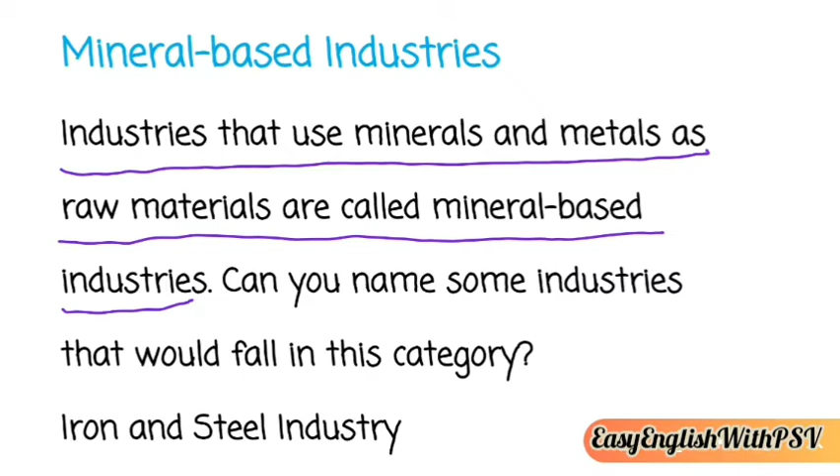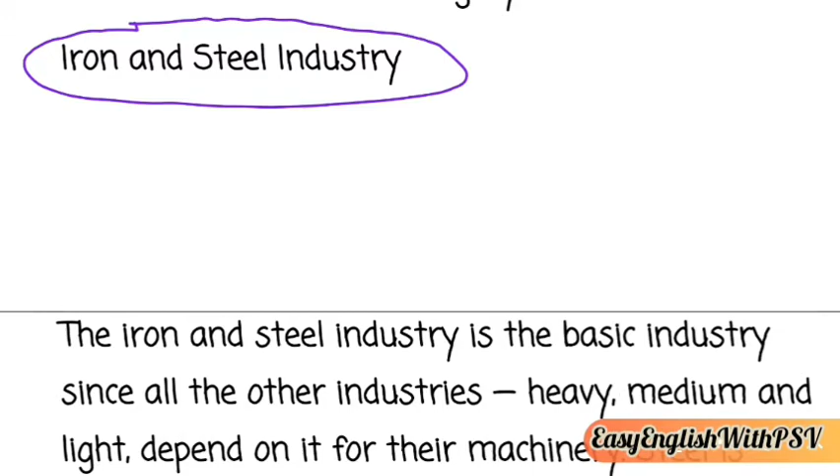So the first one is iron and steel industry. The first heading that we are going to study: iron and steel industry. The iron and steel industry is the basic industry since all the other industries, heavy, medium and light, depend on it for their machinery. Whatever machinery is made or used, that is made up of iron or steel.

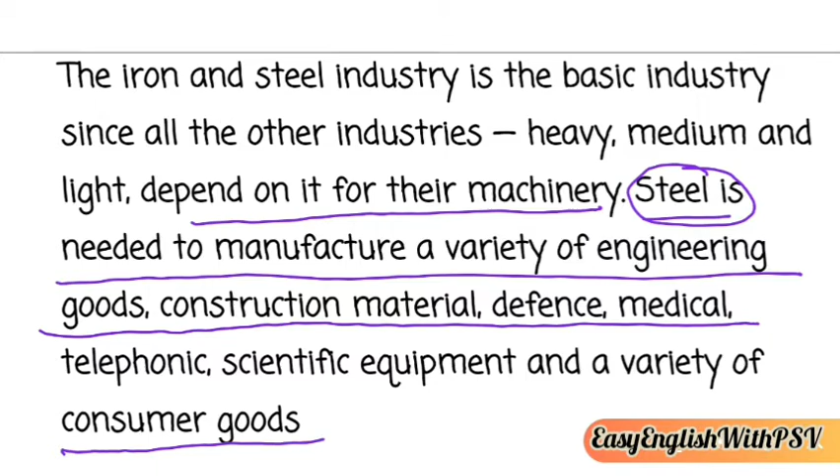Production and consumption of steel is often regarded as the index of a country's development - in what percent, in what measure there is production of steel in the country, and in what proportion there is consumption of steel in the country.

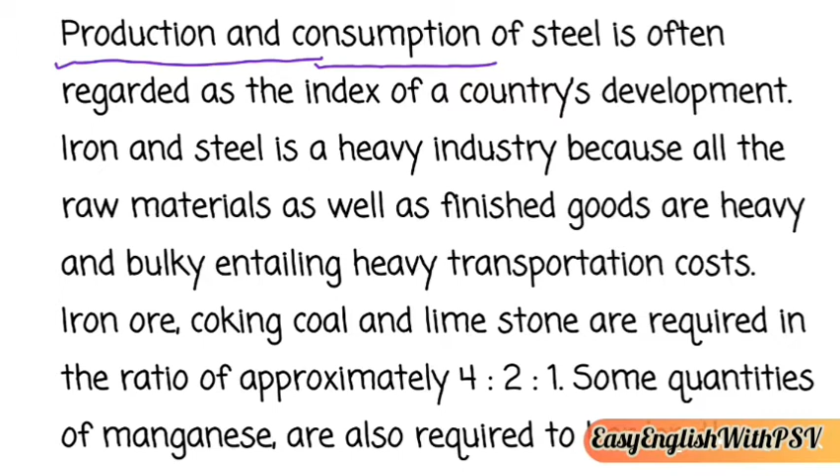Iron and steel is a heavy industry because all the raw materials as well as finished goods are heavy and bulky, entailing heavy transportation costs. Because the goods used in this industry are heavy, it costs heavy transportation charges. Iron ore, coking coal, and limestone - these three are required.

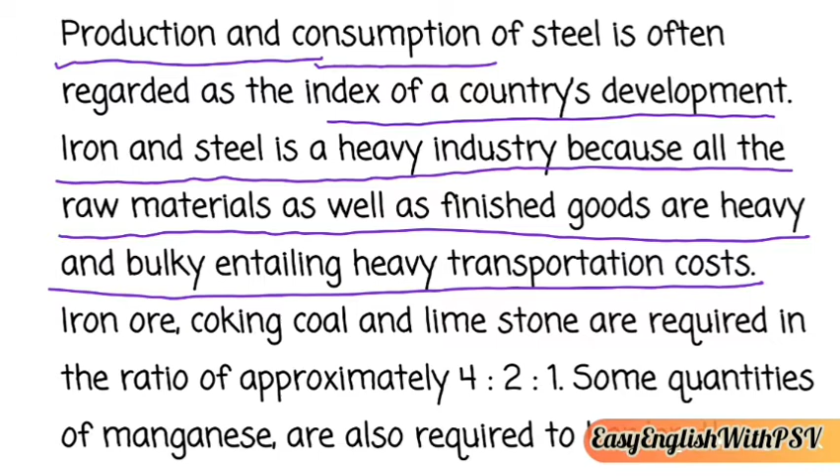Iron ore, coking coal, and limestone are required in the ratio of approximately 4:2:1 - that means iron ore 4, coking coal 2, and limestone 1. Some quantities of manganese are also required to harden the steel.

If you want to harden the steel, to make it tight, hard and stiff, then you will need some quantities of manganese as well.

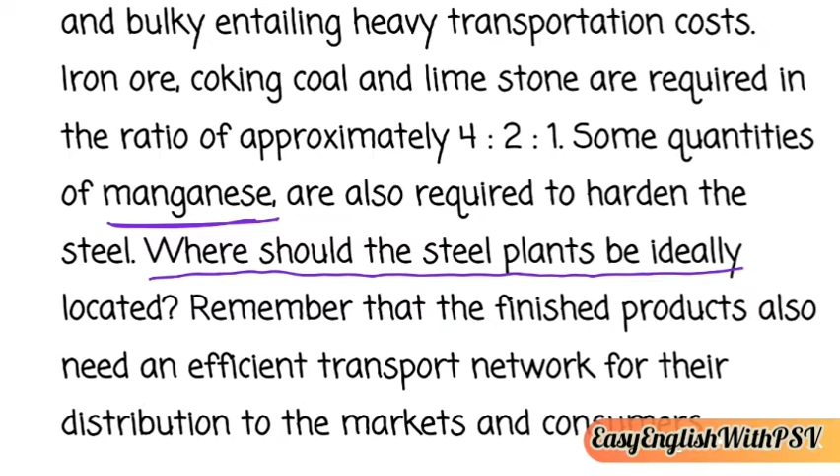Where should the steel plants be ideally located? In agro-based industries, part 1, we studied the suitable locations for any factory: where raw material is easily available, cheap labor is easily available, transportation facilities are easily available, and above all, good market is available. There are consumers, otherwise port facility is available to export goods to other countries.

Remember that the finished product also needs an efficient transport network. If you have completed the task of production, that is not sufficient. You will further need transportation of the goods to other parts of the country, to other parts of the world, and distribution to the markets as well as to the consumers.

In 2018, with 106.5 million tons of crude steel production, India ranked second among the crude steel producers. In that year we were at second place when we produced crude steel, raw steel, with 106.5 million tons. It is also the largest producer of sponge iron.

In 2018, per capita consumption of steel in the country was only around 70.9 kg per annum. We are talking about production as well as consumption of steel in India. That means one person used only about 71 kg of steel in a year.

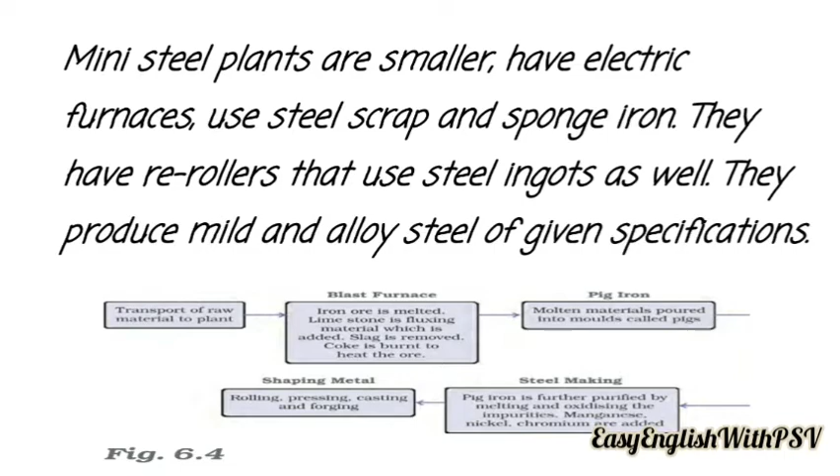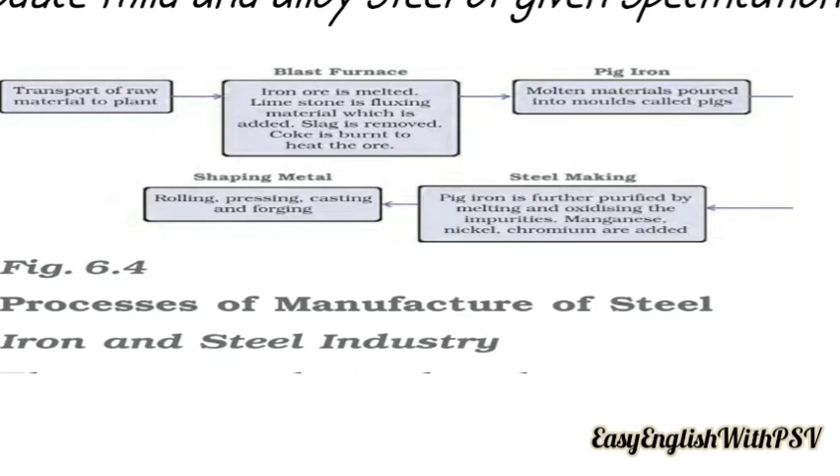Here you can see the process of manufacturing in the steel and iron industry. How is it done? First, raw material is transported to the plant. Then in the blast furnace, a large furnace, iron ore is melted. Limestone is the fluxing material which is added. Slag, the waste, is removed. Coke is burned to heat the ore.

Pig iron: the molten material is poured into molds called pigs. Steel making: pig iron is further purified by melting and oxidizing the impurities. Manganese, nickel, and chromium are added to maintain shine and prevent rusting.

Then the last process is shaping metal: rolling, pressing, casting and forging. In this way we get the steel. So this is the process of manufacturing steel.

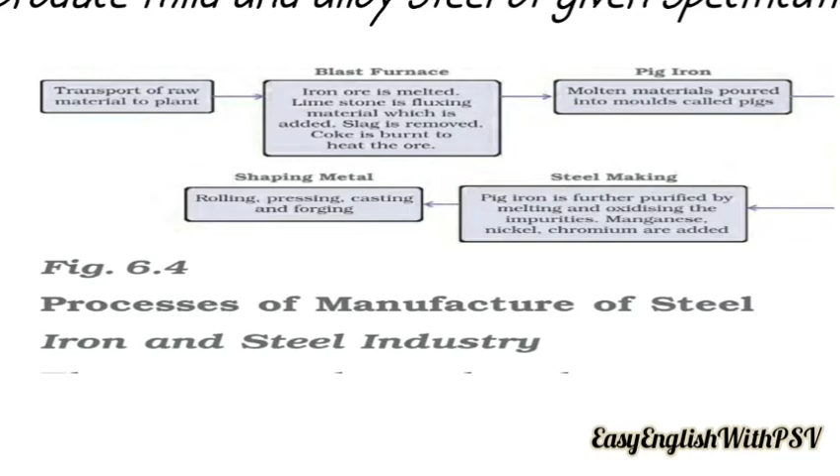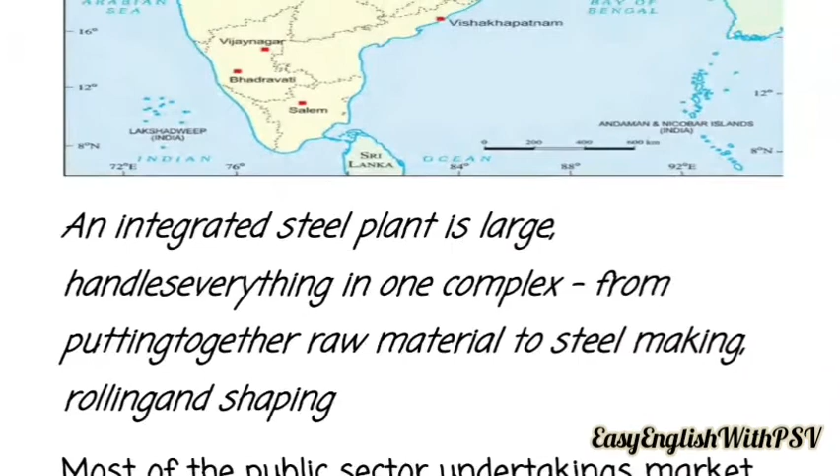We have already studied about mini steel plants. Now, what is an integrated steel plant? An integrated steel plant is large and handles everything in one complex, from putting together raw material to steel making, rolling and shaping. Everything is done at one place. We have already studied how steel is manufactured, so if making, rolling, and shaping are all done at the same place, this factory is known as an integrated steel plant.

Most of the public sector undertakings market their steel through the Steel Authority of India Limited. All the big public sector companies and undertakings in India sell their products and bring them to market through SAIL, Steel Authority of India Limited.

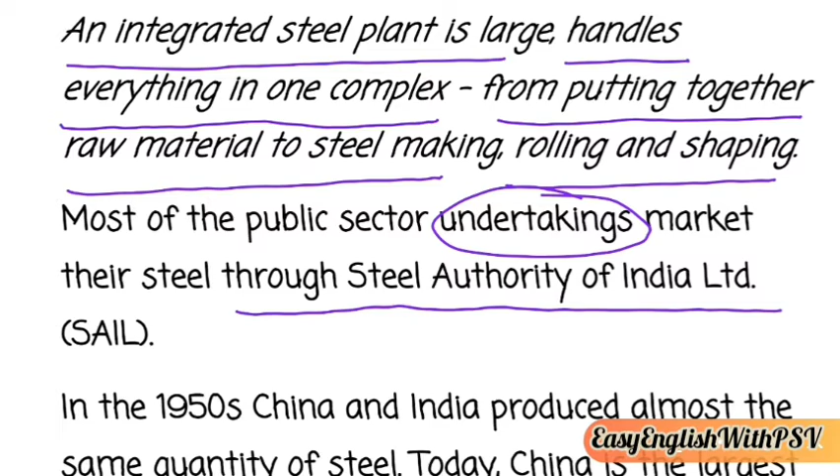In the 1950s, China and India produced almost the same quantity of steel, quite similar in production. Today, China is the largest producer of steel, and also the world's largest consumer of steel. Not only does China produce the most, it consumes the most as well.

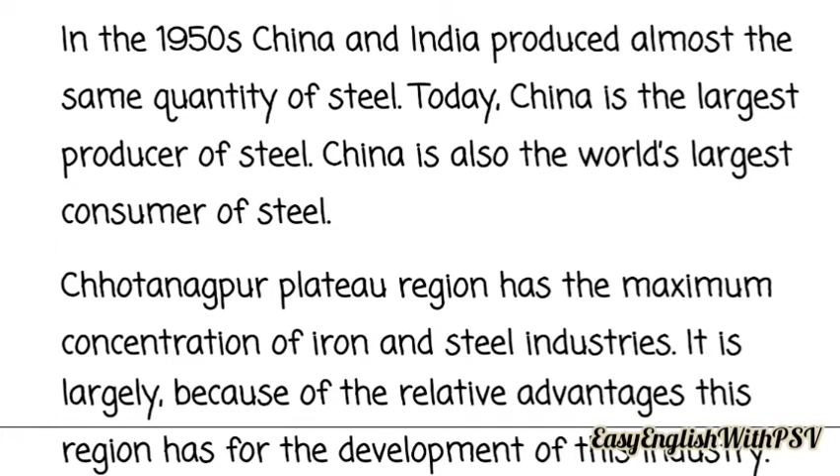The Chota Nagpur Plateau region has the maximum concentration of iron and steel industries in India. Why this region? Because conditions here are favorable.

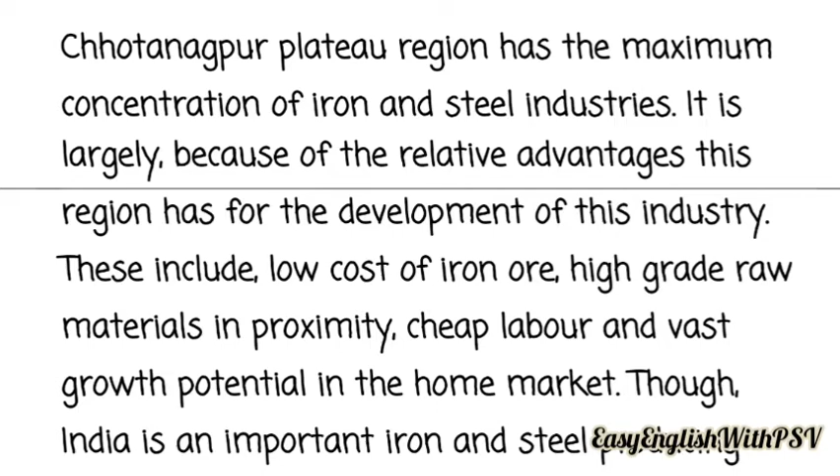It is largely because of the relative advantages this region has for the development of this industry. These include low cost of iron ore, high grade raw materials in proximity and abundance, cheap labor and vast growth potential in the home market. All these facilities are available in the Chota Nagpur Plateau region, which is why it is a suitable place.

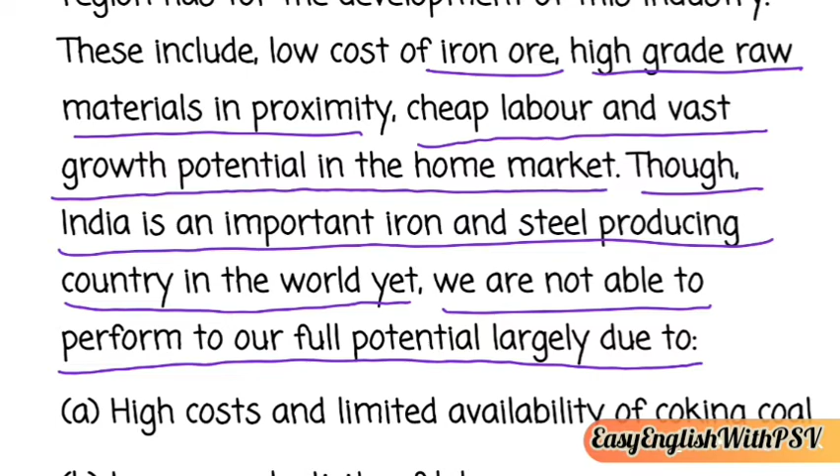Though India is an important iron and steel producing country in the world, we are not able to perform to our full potential due to four reasons: high cost and limited availability of coking coal, lower productivity of labor, irregular supply of energy, and poor infrastructure for the iron and steel industries.

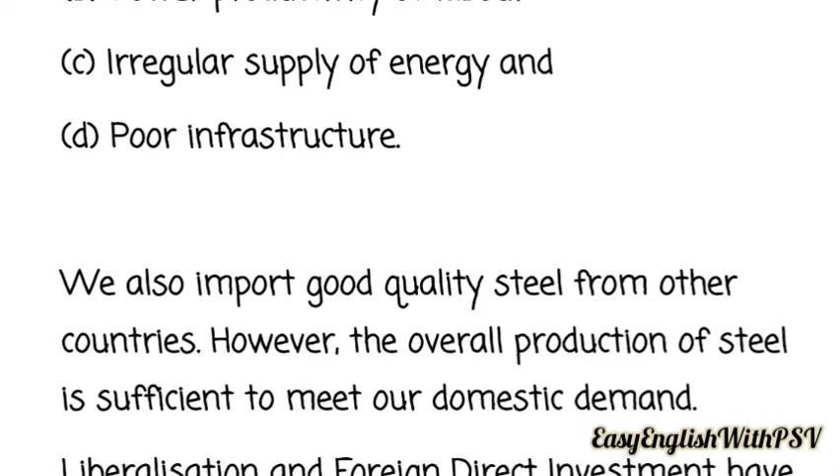We also import good quality steel from other countries because of our requirement. However, the overall production of steel is sufficient to meet our domestic demand, yet we still import good quality steel from other countries.

Liberalization and foreign direct investment have given a boost to the industry with the efforts of private entrepreneurs. Some private entrepreneurs are participating actively, which is why this industry is booming.

There is a need to allocate resources for research and development to produce steel more competitively. We need to reform our resources and develop research capabilities to produce steel more competitively.

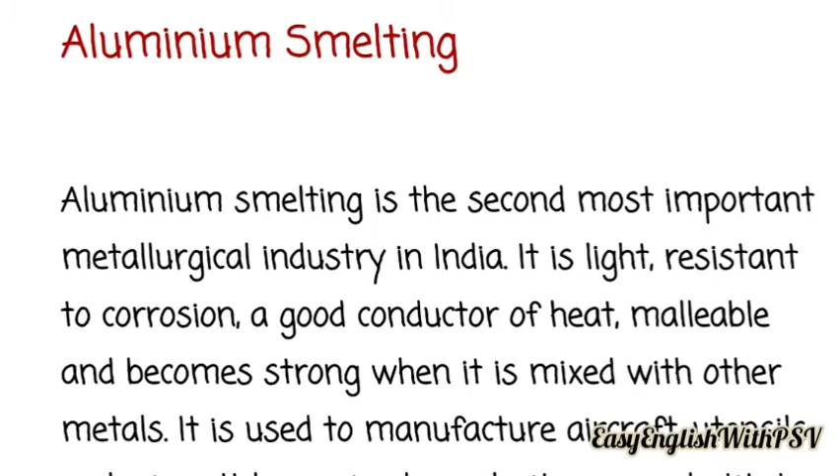Now the next heading that we have is aluminium smelting. In this video, we'll talk about aluminium smelting, and this will be the last heading. Aluminium smelting is the second most important metallurgical industry in India.

Aluminium is light and resistant to corrosion, meaning it does not rust. It is a good conductor of heat, malleable, meaning you can stretch it, and becomes strong when it is mixed with other metals. You can even make utensils from it if mixed with other metals.

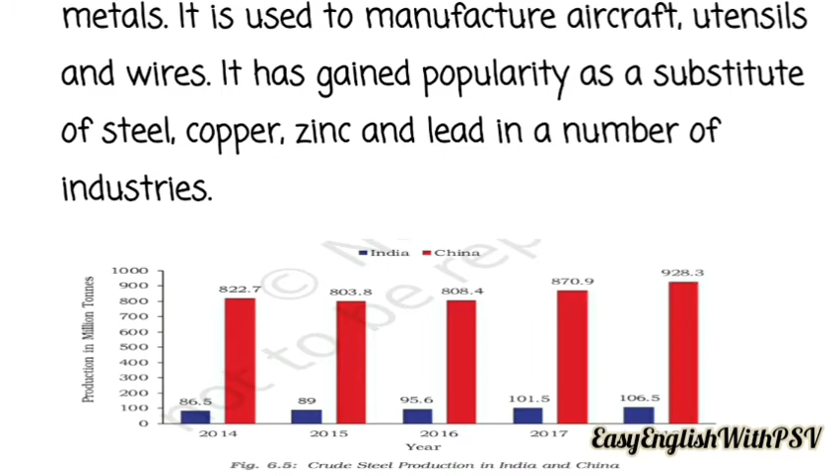It is used to manufacture aircraft, utensils and wires. Most cables are made up of aluminium. It has gained popularity as a substitute for steel, copper, zinc and lead in a number of industries, used in place of these metals.

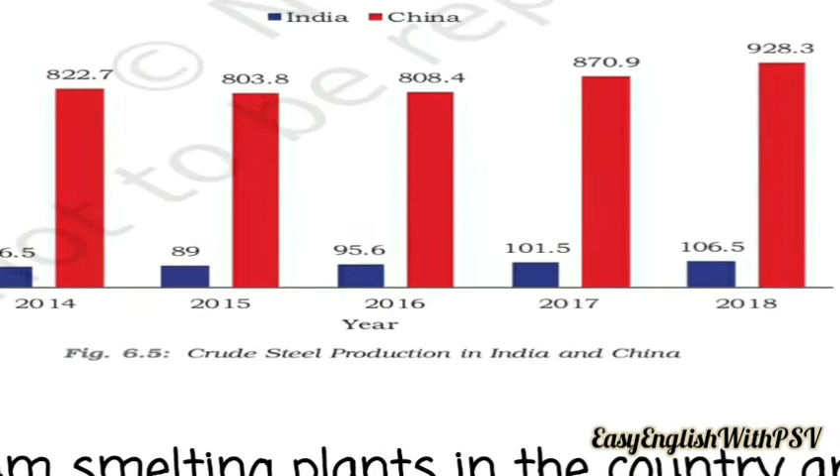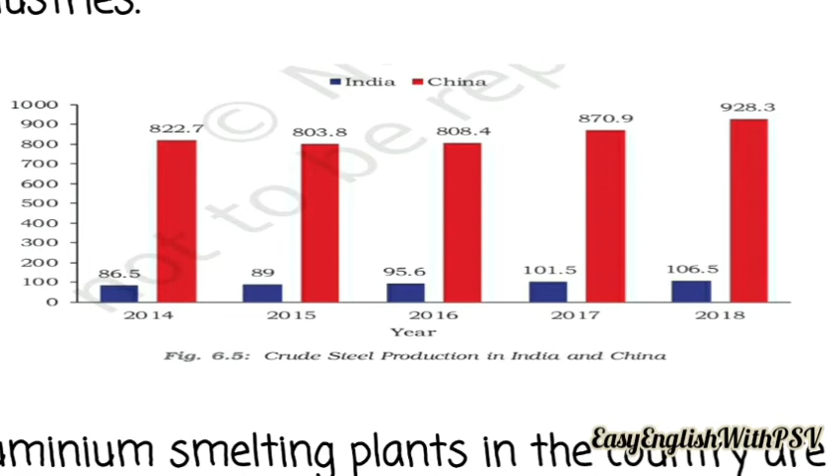If I show you the crude steel production of India and China, which we have just studied about: in 2014, the production of India was 86.5 million tons, while China's was 822 million tons. In 2018, India's production was 106.5 million tons while China's was 928.3 million tons. This is the graph for crude steel production in India and China.

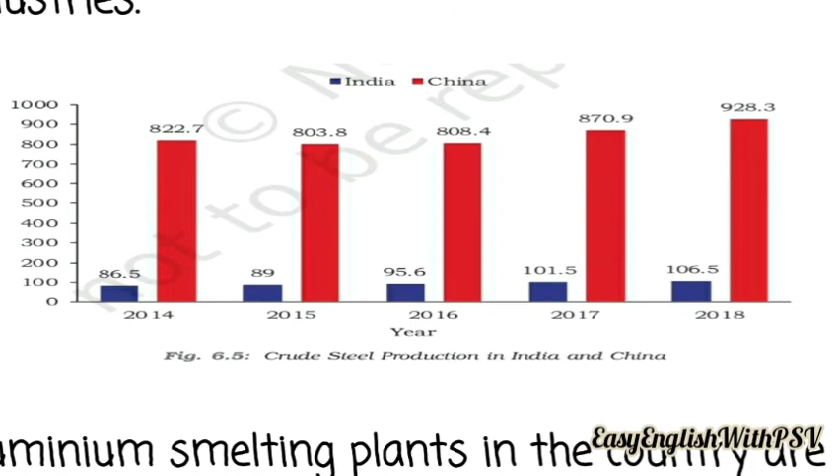Aluminium smelting plants in the country are located in Orissa, West Bengal, Kerala, Uttar Pradesh, Chhattisgarh, Maharashtra and Tamil Nadu. It is basically aluminium smelting plants are located in Orissa because it is also a heavy industry, so the plants are located where raw material is easily available.

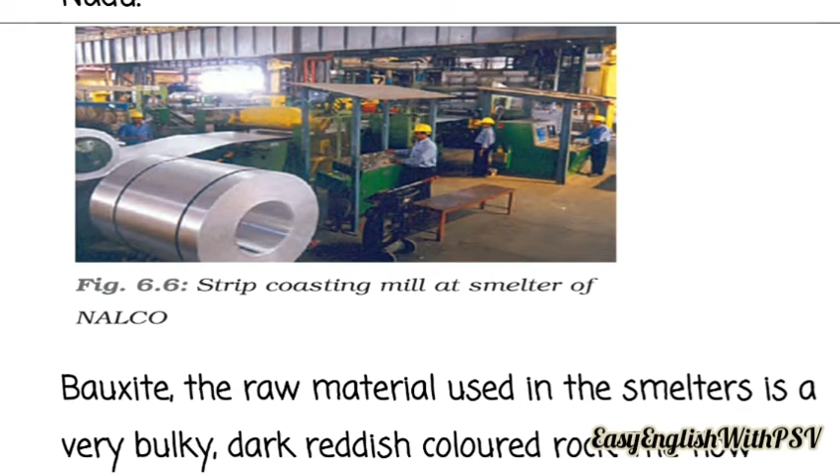You can see here a strip casting mill at the smelter of Nalco, where sheets are being made.

Bauxite, the ore of aluminium, is the raw material used in the smelters. It is a very bulky, heavy, dark reddish colored rock. The flow chart given below shows the process of manufacturing aluminium. A regular supply of electricity and an assured source of raw material at minimum cost are the two prime factors for the location of the industry.

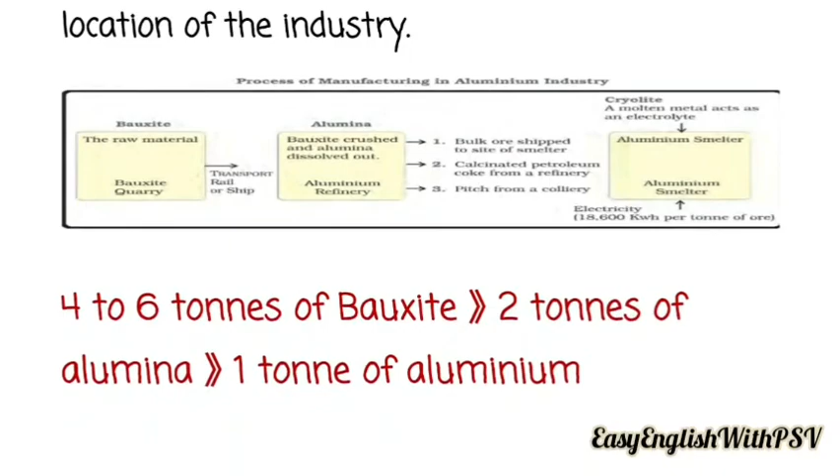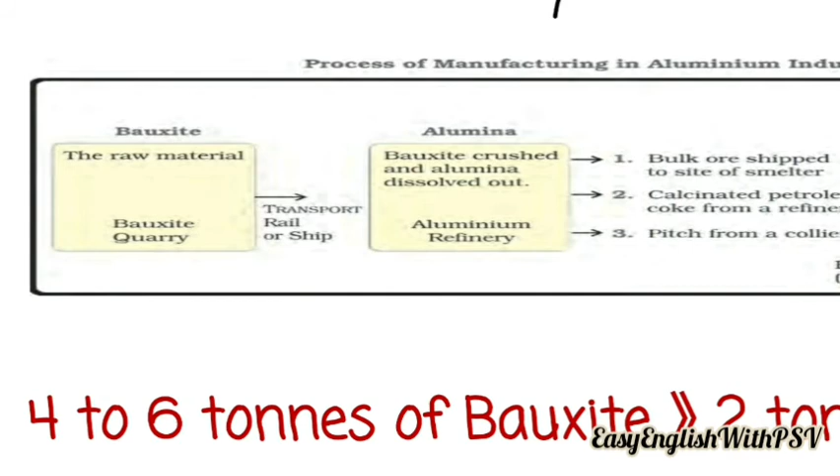If I show you the process of manufacturing in the aluminium industry: first, bauxite, the raw material, is transported from the bauxite quarry to the factory with the help of rail or ship. Furthermore, the bauxite is crushed and alumina is dissolved out.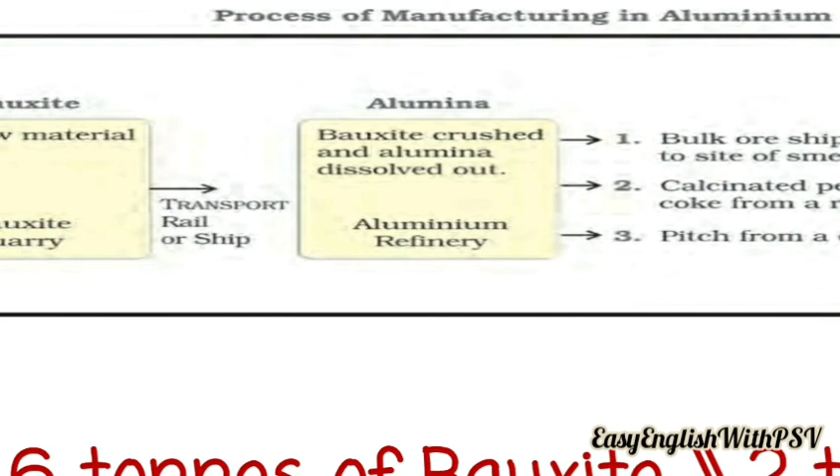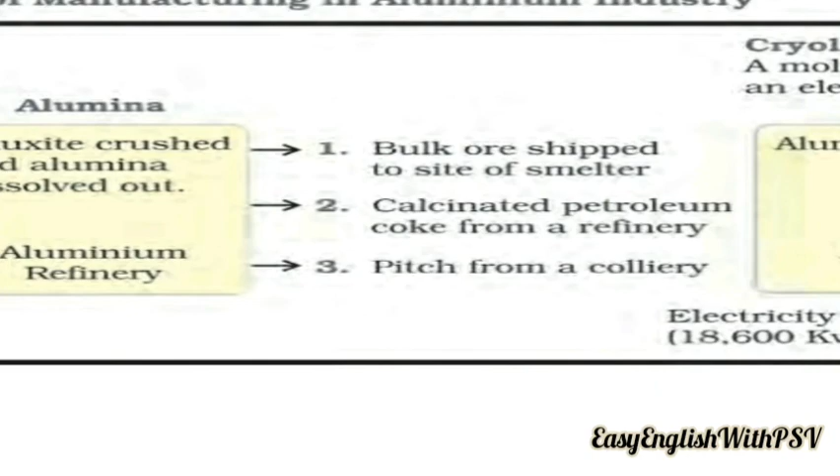Cryolite and molten metal act as an electrolyte. The molten metal that is produced acts as an electrolyte in the aluminium smelter.

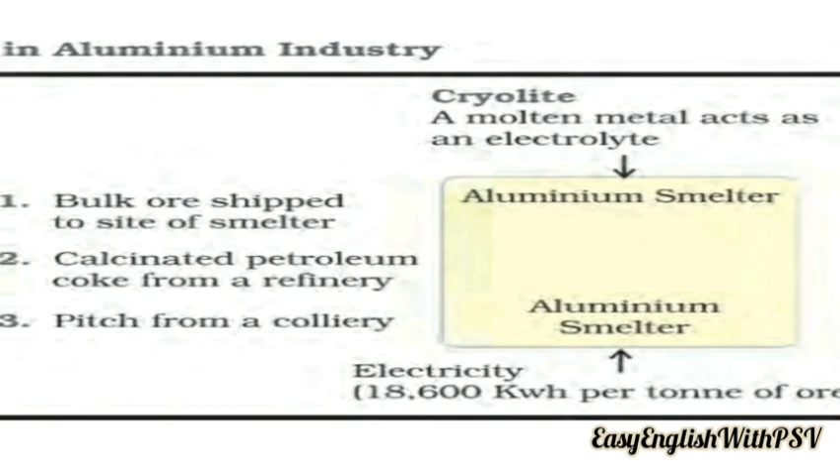Electricity of about 18,600 kilowatt-hours per ton of ore is used. You can easily understand how much energy we spend in making aluminium and how much it costs.

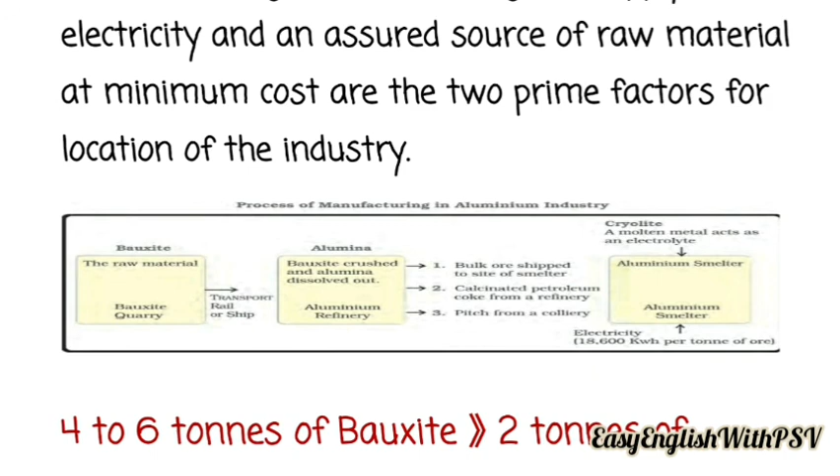For better understanding: if we use 4 to 6 tons of bauxite, 2 tons of alumina is produced, and that 2 tons of alumina ultimately produces 1 ton of aluminium. Simply put, from 4 to 6 tons of bauxite, we get 1 ton of aluminium.